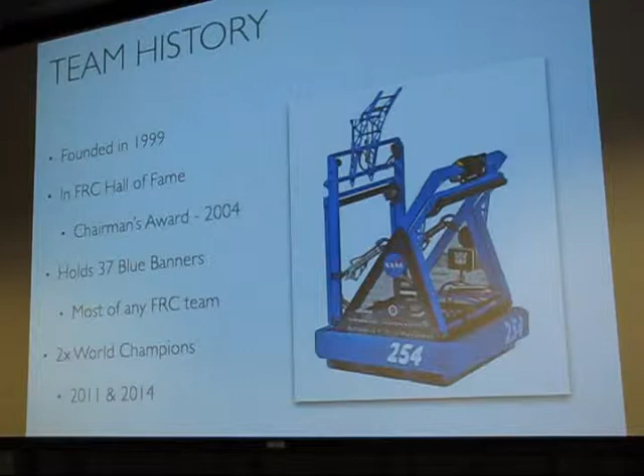What was this game called? This game is called Aerial Assist.

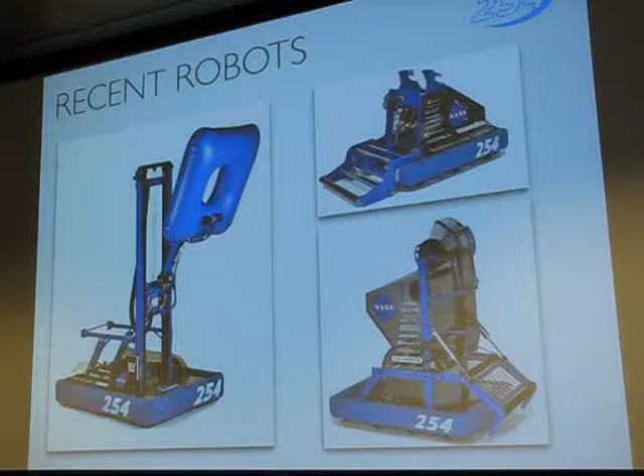So I mentioned that FRC gives you a new game every year, and because January 3rd has already passed, there's a new game for 2015. This year's game is called Recycle Rush. It has a cool little recycle logo there. I should give you the hint - this whole game is themed around recycling.

This slide is a little hard to read, but in the center of the field you can see there's a divider which separates a blue side from a red side. One of the most unique things about this year's game compared to any other FRC game is that this step prevents the blue alliance from ever touching the red alliance, which means this game is not about playing defense or blocking or going around your opponents, but rather about building an extremely efficient robot.

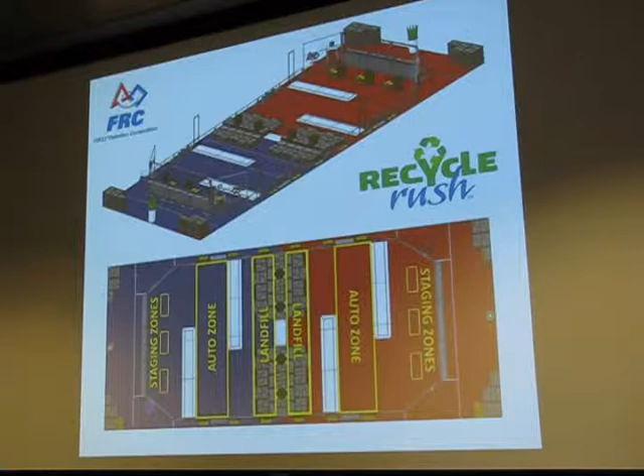The gray rectangles represent a plastic tote, which is only about 2.5 feet by 1.5 feet in size and about 1 foot tall. So it's a pretty large object relative to the size of the robot, and it's also very thick plastic, so it weighs quite a bit.

The goal of the game is to try to stack up these totes, as many as you can, and the higher you go, the more the green recycling can is actually worth. So when you get up all the way to stacks of 6, the max you can go, your recycling can is worth ridiculous amounts of points. So one of the big strategies this year is trying to build these really tall stacks of really heavy totes that are super wobbly - it's almost a nightmare, but we're managing, kind of, sort of.

It's okay, you say totes, is that like a bag or something? Not like a tote bag - it's basically a large plastic box, a storage container pretty much. It has a lid, but the lid stays closed during the game, they zip tie it shut. So it's just a large rectangular prism essentially, but it has slightly trapezoidal sides, so you can't pick it up with a scoop. This year's game is definitely one of the hardest they've ever given us.

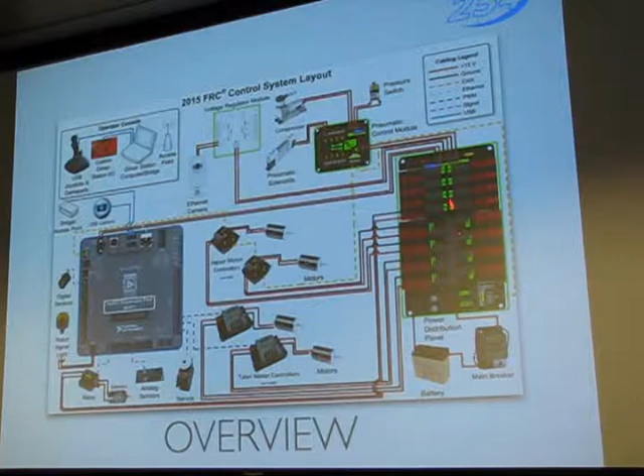So I'm going to talk about the control system for this year, which is different than previous years. First we have an overview. I know this looks a little intimidating, but the major components we're going to talk about are the PDP here, the power distribution panel, the pneumatics control module, the voltage regulator module, and of course the RoboRIO, which is the brain of the robot.

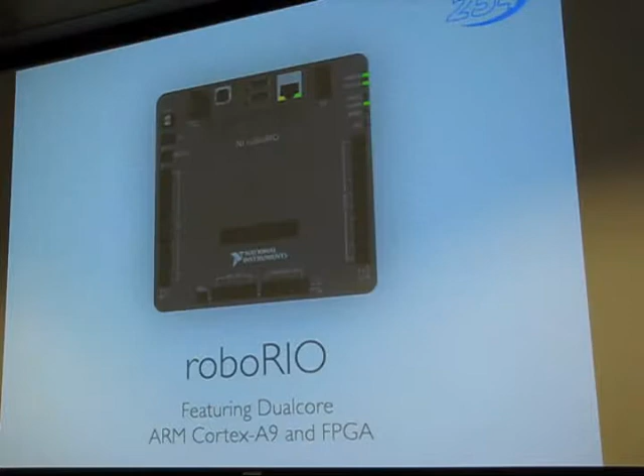So first we're going to talk about the RoboRIO. It has a bunch of these specs you can see here. Not impressive compared to a laptop, but over previous years, it's a huge increase in power, doubling its memory, both non-volatile and volatile.

Also, it's combined 2 units into one, where we used to have a digital sidecar and the cRIO, which is actually on the old robot over there. It combined them both into one now, so you have less space taken up on your drive base for control system elements.

Is that controller commercially available, and how much does it cost? I think it's like $435. Yeah, it comes in the kit of parts though for FRC teams. National Instruments makes it, and because it's combined, it has less ports than it did previously. So what they've done is added this expansion port, which I'll talk about later, but allows us to have more ports than what it has just on it.

So here are some sensors and motors that you plug into the RoboRIO. You have a motor controller and a motor. This is a CIM. This is a Talon. What Talon does is, well, most of you guys probably know, but it takes power from the PDP, the power distribution panel, and a PWM signal from the RoboRIO, and from that determines the magnitude and direction of the rotations on the motor.

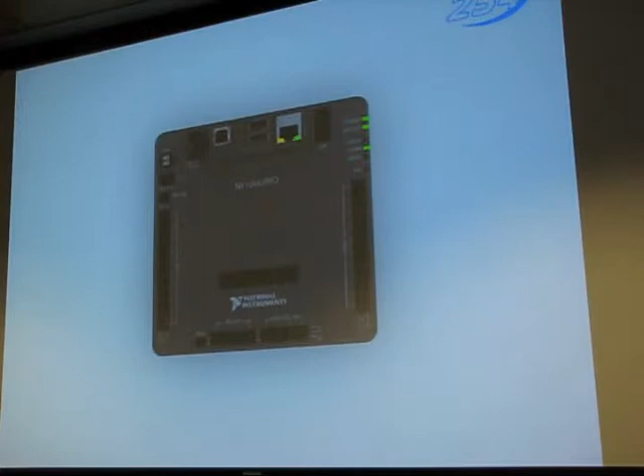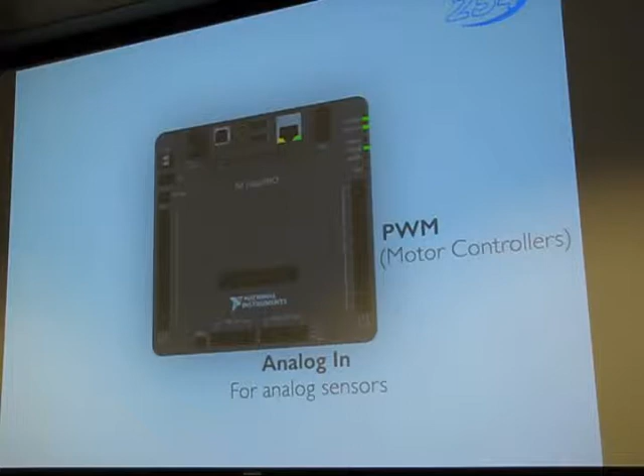All right, so this is a picture of the RoboRIO close-up. First we have PWM, and we have 10 of those, numbered 0 through 9. Those are for your motor controllers. We have analog in for analog sensors. We also have relays over here, but relays aren't used as much because the pneumatics control module can actually take care of some relays. Then we have digital I/O, for digital sensors and peripherals.

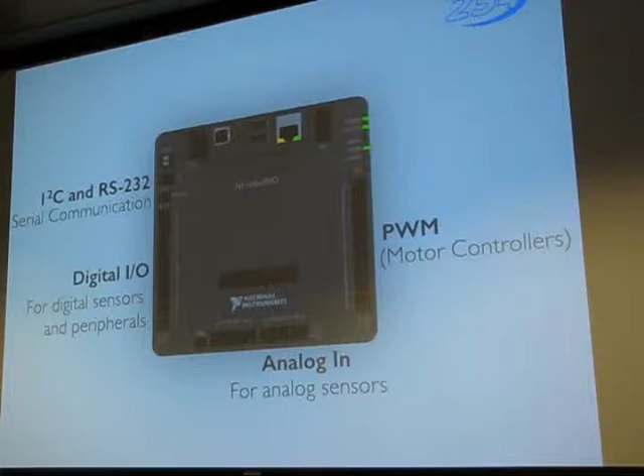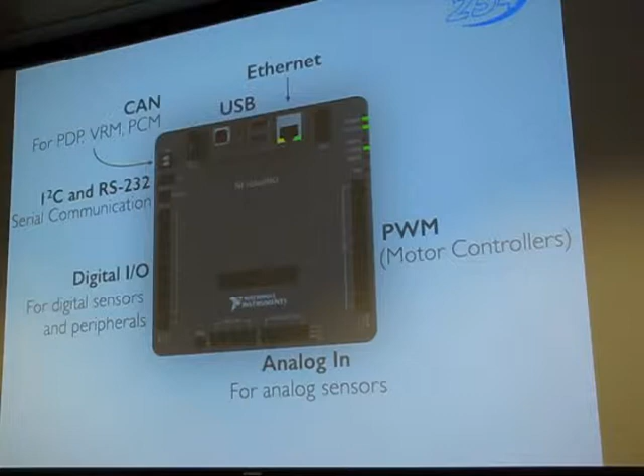We have I2C and RS-232 for serial communication, which previously wasn't available. We have CAN - I'll talk about this even more later, but this is the method that the PDP and PCM communicate with each other, as well as the RoboRIO. Then we have USB - USB host and USB device, Ethernet, and SPI. That's the expansion port right there in the middle. It actually allows you to get analog out, which is not offered on any of these other ports on the edge.

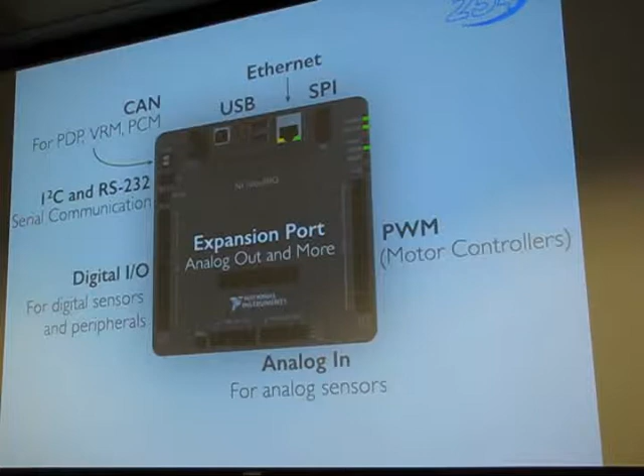So this is the power distribution panel. As you can see, it's got 40 amp channels and 30 amp channels, and it also powers the VRM.

Yeah, that would melt most of our robots. Yeah, this is powered by a 12-volt motorcycle battery. So you go grab the battery. Just to give you an idea of perspective, it takes a lot of power to power this guy. Wow, and that thing is drained after 2 minutes. Yeah, 15 amp hour. Wow.

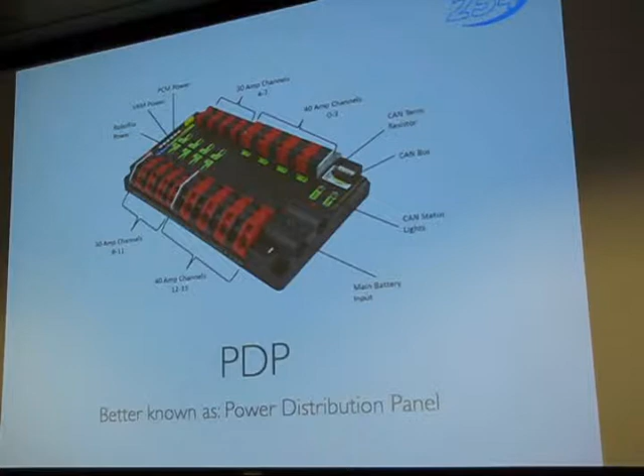So the battery has an Anderson connector that plugs into some leads that plug into this housing. These are CAN status lights, and the CAN cables that connect all the modules together plug in there. These power terminals over here power the other components. CAN data you can get from the PDP includes temperature, voltage, and current, to name a few.

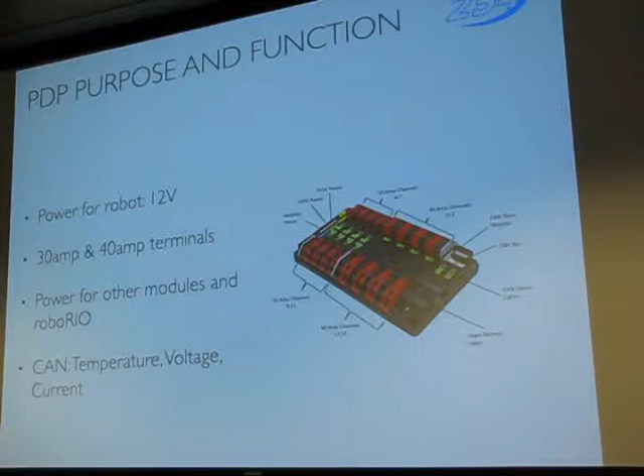So this is the PCM, the pneumatics control module. You would plug in all your solenoids, which operate the cylinders or any other pneumatics pistons. I don't think most of these robots have a lot of pistons.

Actually in FRC we use a lot of pistons. Last year I think we used the most pistons we've ever used before, we had like 17 on that robot. So the robot, because it uses so much air, has a compressor on board too, and it has to refill its air tanks. It actually has a lot of air tanks, 6, well now 7, because you're running out.

Are those also known as solenoids, or do they work like solenoids? Yeah, so you have the solenoid, and basically the solenoid actuates the valve, pushing air on one side or the other.

What's the PSI on the piston? It's like 20, it's regulated, pretty low compared to what it would take to charge a car tire or something. 50, 60 PSI or something? 60 on the outside. 120 internal, and then regulated down to 60.

All right, so it has 7 solenoid channels. Actually, it has 8 solenoid channels because there's a channel 0. And the CAN controls the compressor and the solenoids, and of course the pressure switch. So this is the pressure switch, this is a solenoid, and this is a compressor, although you can use different parts. They have to be similar though.

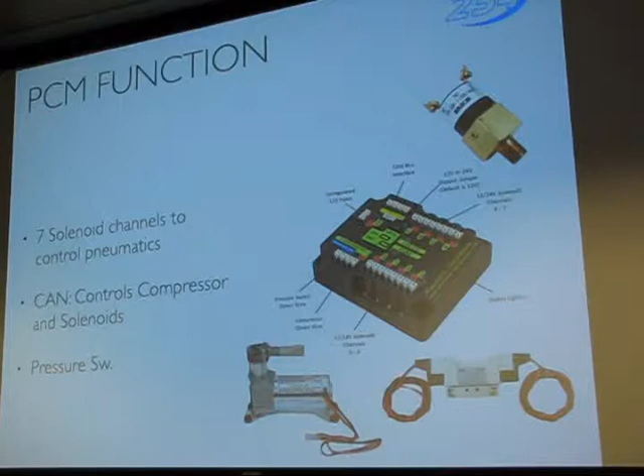And so here you can see the overview again. Now that I've talked about all the parts, it should make a little more sense. One part I didn't talk about though is the main breaker, that's like the power switch for the robot, basically, and like the webcam and some more specific parts that not all teams use.

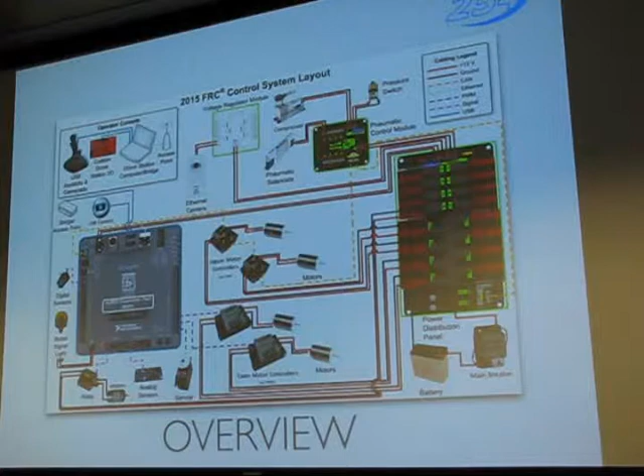And those are boards where you have a laptop and some peripherals. Torrance is going to go get one. It has joysticks and a button board, or some people use steering wheels to move the robot, but that controls the robot in its teleoperated period.

So that's ours from last year. The laptop is what's actually sending the commands through the switch to the router, which goes back then to the robot. And then we have a button panel over here, so you have one student that can operate all these different buttons, which do tons of different features on the robot. It'll lower this thing, actuate this back, spin up the wheel to shoot. This is called the operator, the student that stands and uses all these buttons.

The operator communicates with the driver, who has simply 2 joysticks configured to drive a lot like a first-person shooter. One moves you forward and back and can turn you, the other turns you left and right. In combination, it makes it easy for the driver to smoothly drive around the field without a lot of stop, turn, stop, turn. With enough practice, you can get really good drivers, and that's a big part of your success in the match.

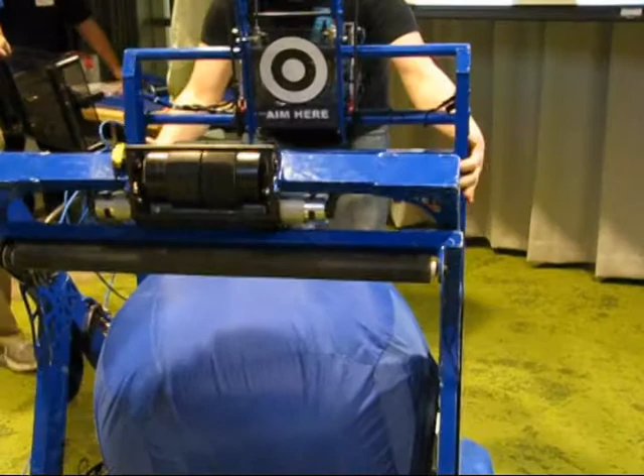Let's get rid of this guy. Actually, no, let's just slide that table out of the way. Where do you want to move? Yeah, let's move the robot. One cool tidbit of info is that we name all of our robots after Decepticons, because Decepticons are super cool. So Barrage is our most recent robot.

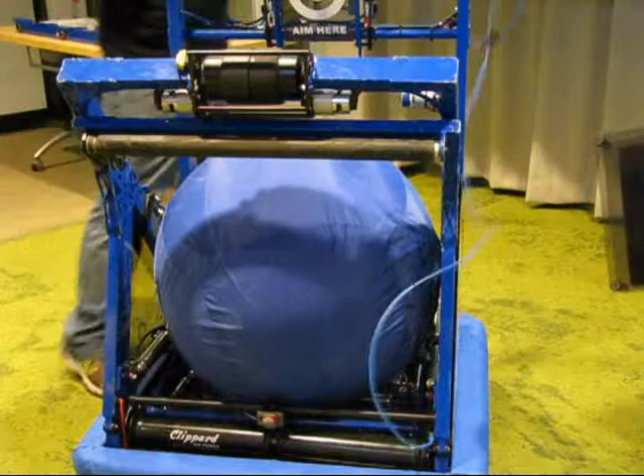What are Decepticons? They're the evil version of Autobots—both Decepticons and Autobots are Transformers. Robots in disguise. Autobots are cool, Decepticons are even cooler. How did you guys end up with the number 254?

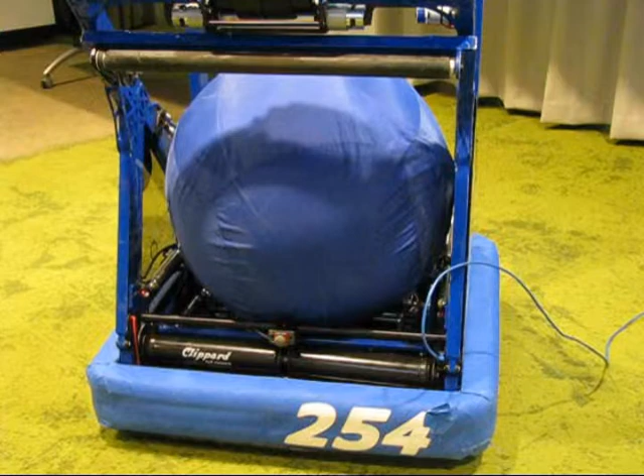They're up to 8,000 now. I'm gonna turn off the microphone, put it down for us. Can you turn on the robot? Yeah, that's a good first step. Now, we don't have liability insurance, so it's not gonna start throwing the ball at us, but it's promised not to move. You actually have to turn it that way so we don't shoot it anyway. Try not to break it. Yes.

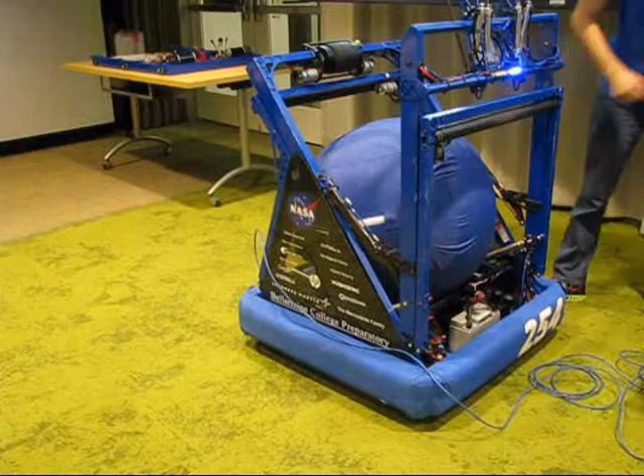Okay, awesome, let me back up a little bit. Aim at the thin glass windows. So one of the things our robot can do is defense. Aim it at... is that Google space? Employees, so there's no liability.

Okay, so let's just do a front exhaust. That was one button that operated two different systems simultaneously. On the interior of the robot, we have a hinged series of two bars that can independently actuate up.

Let me actually—Ryan, you hold this, just don't press any buttons. So you can kind of see it in this photo: there are two bars that are individually actuated up by pneumatic pistons, so they can go up like this.

When we shoot the ball, both sides will come up at the same time and clap together. Because of that clapping action, we call it a pinniped, which is the scientific name for a seal, because it claps like that.

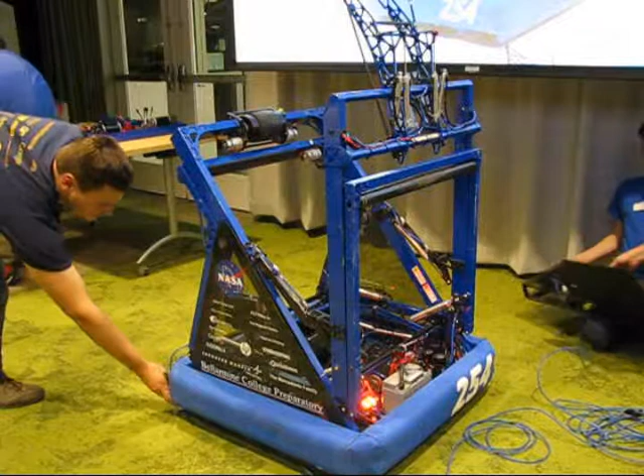The intake roller has a black horizontal roller you can see in the photo at the front. The black roller spins and sucks in the ball as the angled weldment comes down over it. So we'll get rid of it—sample return—and then roll it in one more time.

One of the features we tried to design around was making it so it can pick up the ball from the side. You don't have to be straight on, which helps a lot with driver ease and ability.

So we're now going to go to shooter speed 1. Our shooter system is actually the part of the robot I worked on the most. It was super cool, I like to brag about it a lot.

The front roller you can see there—this is a large black rubber flywheel that's very heavy and has a large moment of inertia. When we spin this up, we use two pretty large, beefy motors. You can see this is one of the motors we use to spin that, and it will get up to our max speed of 5,000 RPM.

We're not going to 5,000 RPM indoors, but it's very loud. We'll use that speed when shooting the ball in a Hail Mary across the field, but most of the time we're spinning at a much slower, more controlled speed, fine-tuned around those slower speeds.

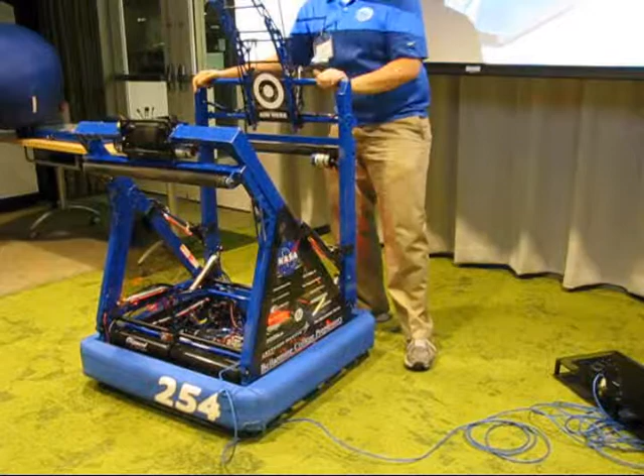If you haven't seen it yet, we've got a great little target right here. This is aimed here. Target is not a sponsor, although, that is a trademark infringement. It's for educational purposes. Educational, yeah.

Okay, so let's do... and this is the... no, I'm not gonna shoot. There's the other position on the hood. You can see what this looks like now. With this back, it'll be a high release angle. I don't want to shoot that in here or it'll smash the roof. So, yeah, definitely not part of the contract.

Okay, so I guess the one other thing we didn't show is that it can drive. It can drive really fast, actually, almost 20 feet per second at top speed. The field, for perspective, is 60 feet long, so it's almost the length of this whole room. Our robot can cross that field in about five seconds or less. Maybe like three, if there's no one in the way. With robots on the field, you've gotta go around people.

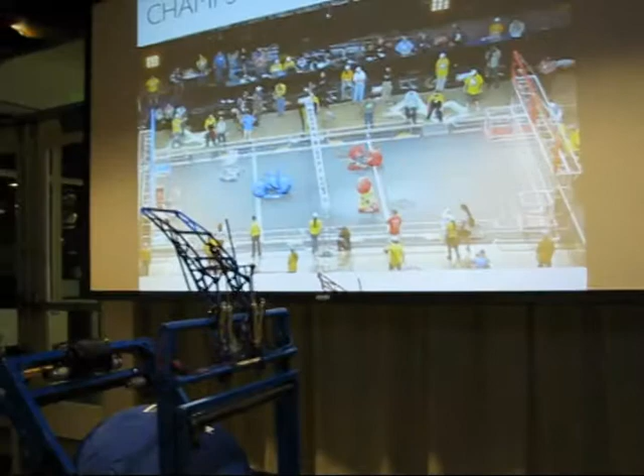Actually, let me pull this up, I want to go back. One of the coolest robots in that final match with us actually had... way too far, wait. I'm gonna pause it, I think. It's the yellow one, right? The reason I'm showing you this is I want you to see. Oops, no, darn it, it's the yellow one. Okay, so this yellow robot, Team 1640, is actually a robot with full swerve capability. If you look at it drive, it's actually not moving in straight lines relative to the frame. It can fully turn all of its wheels 360 degrees. You'll see that down here, they're going to try to drive around us, and they're driving sideways right there. Now they're pushing into us laterally. So it's definitely a really good feature to have, but you can also get pushed around a lot. But now I've gotta talk about the cons, and the reason why all of our robots for the past five years have all been a very straightforward six-wheel or eight-wheel drive.

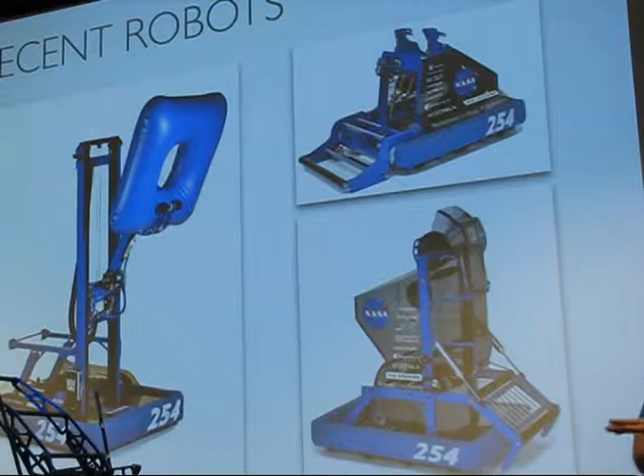So you can see 1, 2, 3 wheels on this side, 3 on the other. The straight wheel alignment is extremely simple and lightweight, which makes it so we can focus our efforts in the 6-week build season on other parts of the robot.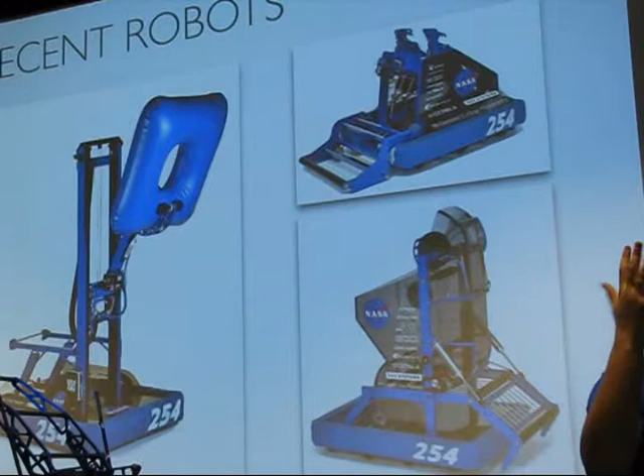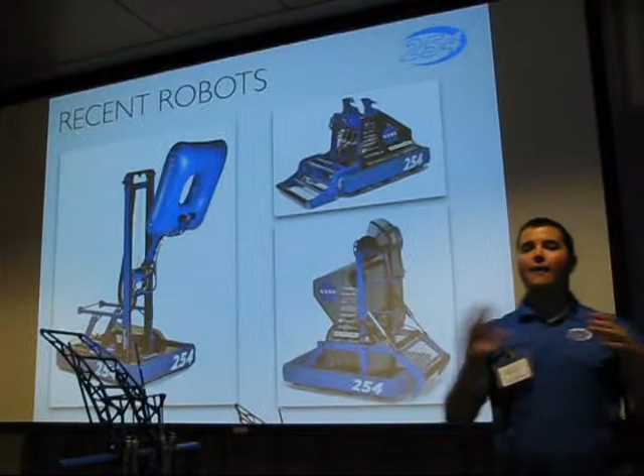Teams that build really complicated, fully turning things, or use more complicated omni wheels with fancier programming to allow them to strafe, all of those teams typically have a heavier drive base. They spend more time making it, more time tuning it, and it breaks down more often. So we prefer to use a tried and true 6-wheel drive, and then train our drivers to be super good and build the rest of the robot to the best of its ability.

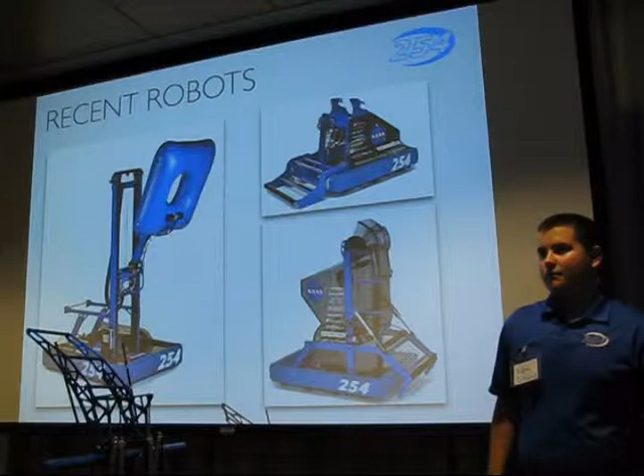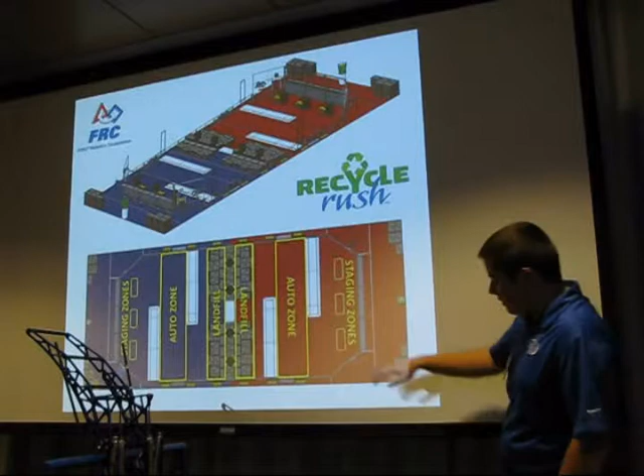In this year's game, how much do you have to rely on your allies? Let me pull up the image while I talk about it. This year's game is definitely an interesting one because there's this clear division between red and blue, and you're not really allowed to interact with the enemy alliance. It means you have to work a lot more closely with the members on your alliance. Also, you're only working in half of the field compared to last year, when you had the whole length. So you're kind of afraid of bumping into your other alliance robots, and there's definitely some coordination that's required.

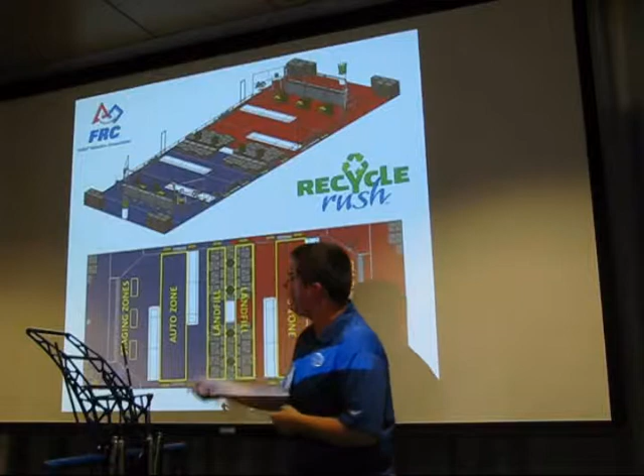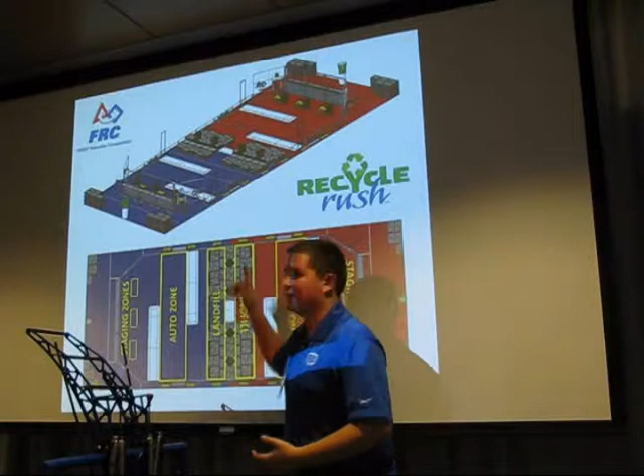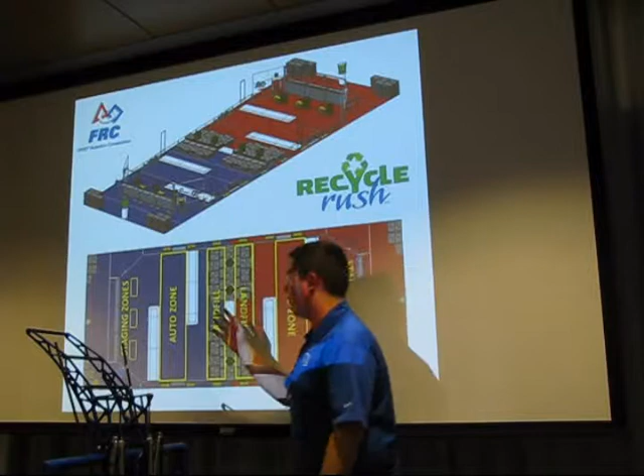The major rule of thumb with our team especially is that we never design our robot to be dependent upon another robot. Because of the way the match scheduling works, you're randomly paired with people and randomly paired against other people. So you can't guarantee you're going to be with that robot that can, for example, put the recycling cans on top in this game. That's a huge point value. If you don't happen to be with that robot in that match, you're going to get way less points than you could have. So our rule of thumb is always design a robot that can operate independently to the best of its ability and not have to rely on anyone else.

And when you do have partners, especially really good partners, it's just an exponential boon over what you could have gotten originally, rather than being a detriment for when you have a so-so or average partner.

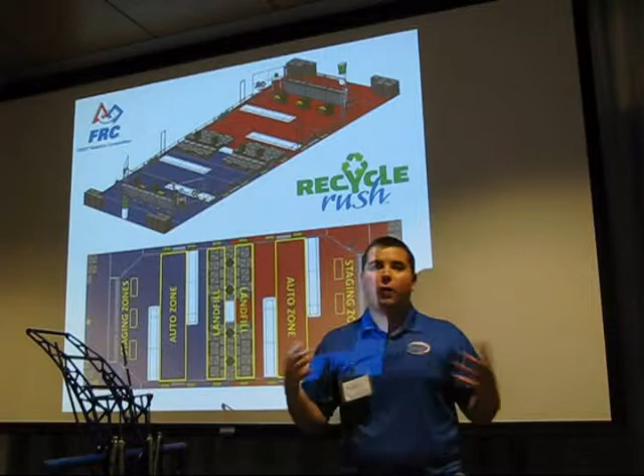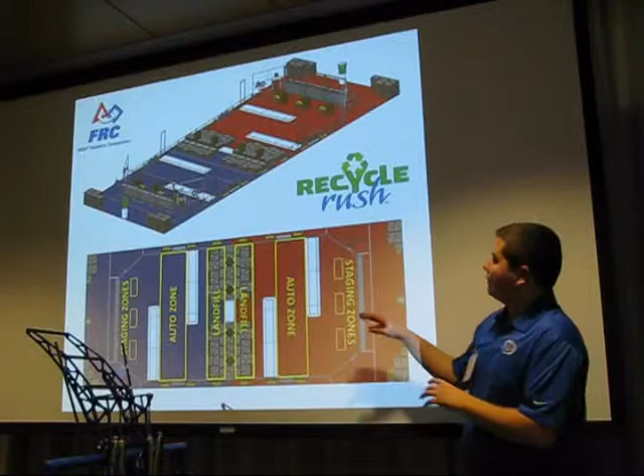Are you allowed to coordinate a strategy with your other partners during each match? Definitely. Before the match, you actually have quite a bit of time when you're standing in line and waiting, and you can be talking with your partners. This year, the strategy might be simpler to communicate because all you have to do is say, okay, I'm going to be in this corner, you're in that corner, and third robot's over there. That way you won't bump into each other—boom, boom, strategy's done.

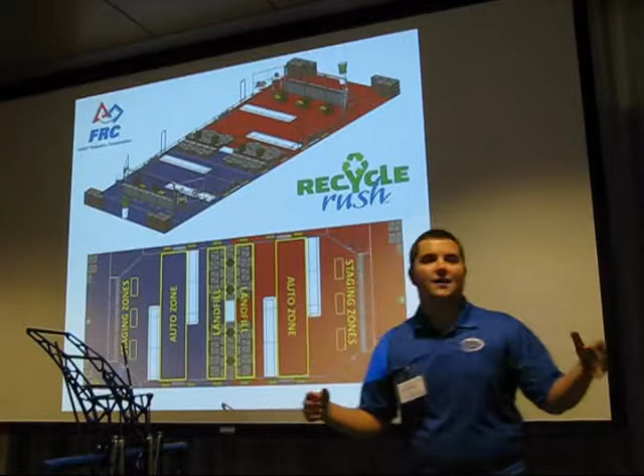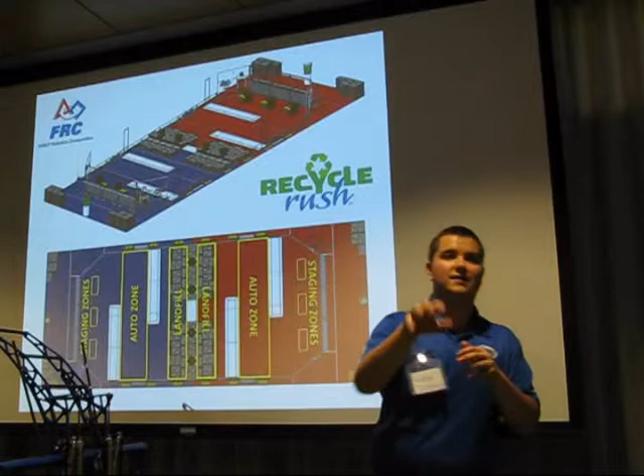But sometimes, if your robot's dependent on others, you will have to strategize with them. If we remember last year's game with this robot, the amount of strategy that went into a match was ridiculous. You had to pass the ball between different robots, and you had to do it in certain colored zones. So you had to be in the correct spot on the field at the right time to be the correct robot to receive the ball. Then you had to know what to do next, like throw it over the truss or something. So all of those different steps were something that we talked about.

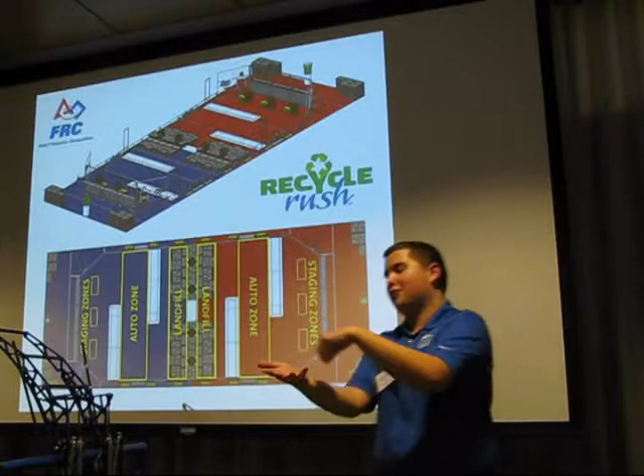One cool thing is last year we actually made play cards, like in football, where you have a laminated sheet and you draw out the path that everyone's going to go. We had stuff like that, but for robots. So we'd be like, oh, you go over there, you go over here, and together with our partners it allowed us to make really effective strategies for each match.

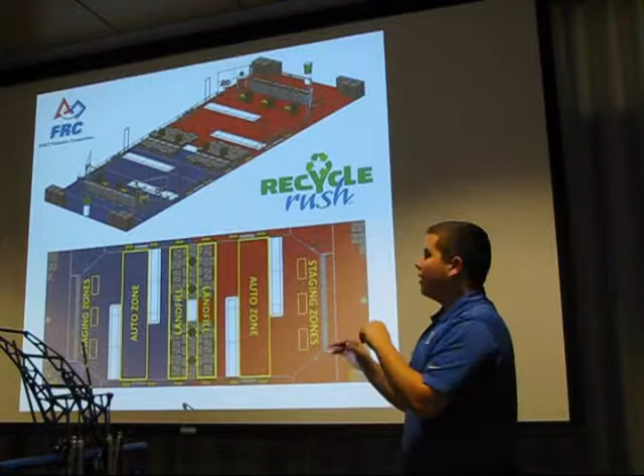In the majority of the tournament—Friday and Saturday of a 3-day tournament—you're mostly playing only qualification matches where you're randomly partnered with people. So no one really wins when you win a match; it just places your robot higher relative to the robots that lose. However, when you get to Sunday, you have to do playoffs where the number 1 robot will pick some other robot, usually the number 2 robot, and then the number 3 robot can pick usually the number 4 robot, but it can vary depending on if you want to play a specific strategy.

So it's at that point when you get to the elimination matches where the teams that you pick, if you win, those will be the teams that also receive the exact same trophy, the same medal, the same blue banner. Were you guys the pickers or the pickees?

It varies, but for the championship we were the number 1 seed, so we got to pick. In our division of 100 teams, we played 10 matches and didn't lose a single one, which placed us at the number 1 spot. We picked the number 4 robot because they were super good - that was team 469.

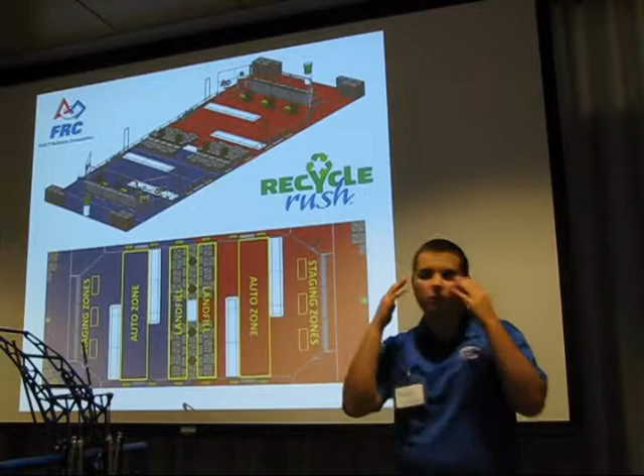Then the other alliances actually got to pick, so it went first pick, then second - 1, 2, 3, 4, 5, 6, 7, 8. Once you get to 8, it actually goes back serpentine: 8, 7, 6, 5, 4, 3, 2, 1. Our number 1 pick was the best robot in our opinion, but our second pick for our third robot was pretty low on our totem pole, but pretty high relative to the other 50 teams. So there's definitely a ton of strategy that you don't even have to know how the robot works to help with - choosing which team to pick, who we're going to play with, how that's going to be better than this robot, stuff like that.

Do you have a strategy for this year's robot, or are you still in the brainstorming phase? We definitely have a strategy. I'm not really allowed to share it with you because it may vary, and we also want to keep it secret until our robot's revealed. Once you see our robot, you will instantly know what our strategy is. I'll just put it that way.

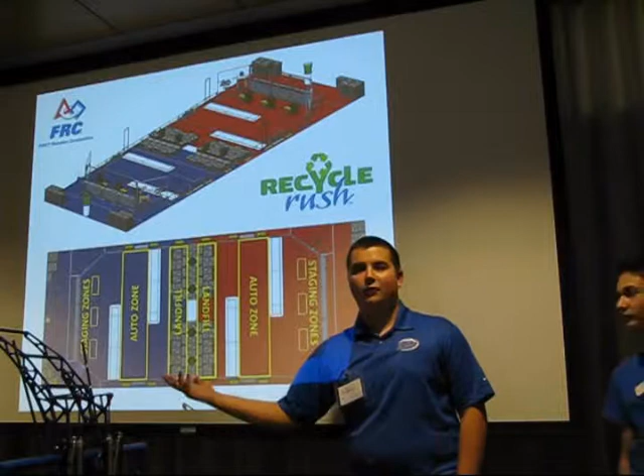But definitely the strategy portion of the game is one of my favorites because it's where your team has the most flexibility. Last year, our big strategy decision was to do that 3-ball autonomous mode, and that ended up being really good for us. We designed our whole robot around that, and it was awesome. So we just gotta hope.

Are you going to do a 3-object autonomous mode this time? Very likely. I'll say that.

Has this robot ever lost? Yes, it has. In addition to losing matches, occasionally we get randomly paired against 2 or 3 really, really good robots that are just as good as us, and there's no way we can beat them - we just lose that one match. We got lucky at the World Championships and didn't have that happen, so we were able to get undefeated for those qualifications. But this robot's been in many competitions.

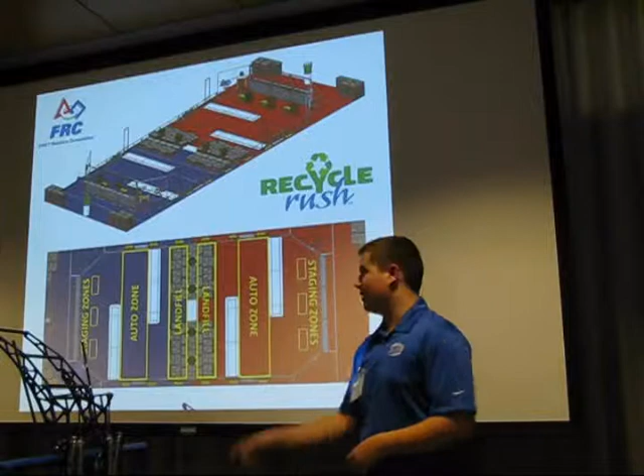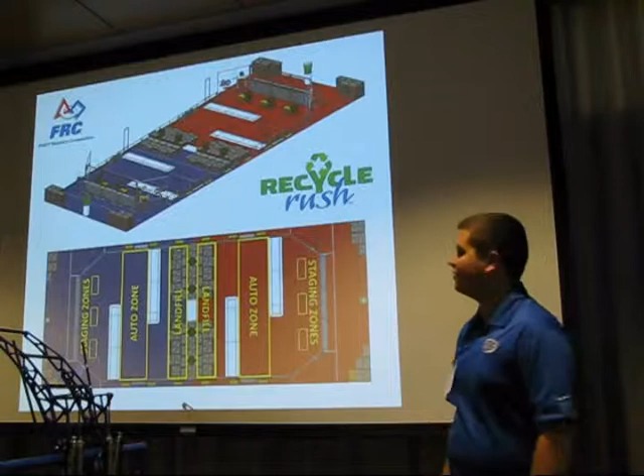In the reveal video, you saw that we mentioned the Central Valley Regional, which is in the city of Madera, and the Silicon Valley Regional, which is in San Jose. That's actually coming up if you guys want to check that out - it's at San Jose State. I think it's the same time as Robo Games.

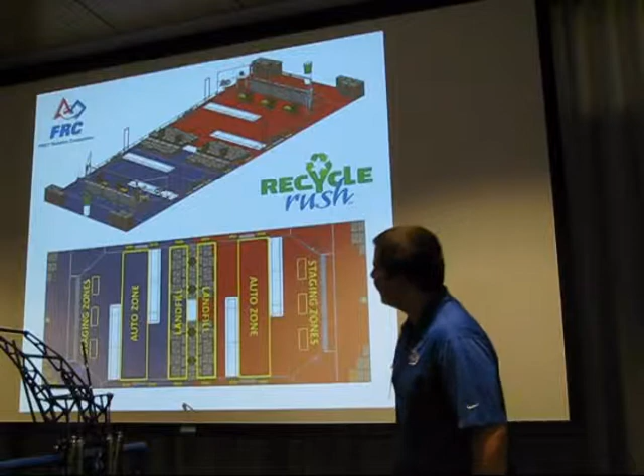Oh, really? That's terrible timing. Well, if you don't want to go to Robo Games, or you're unable to, I'll just say that FRC events are free admission. Robo Games is awesome, I'm not dissing Robo Games at all. That's okay, that's my big selling point. You'll do well, Andrew. You'll do well.

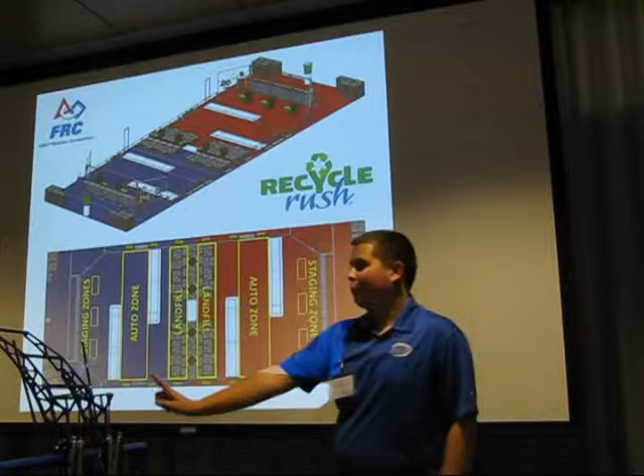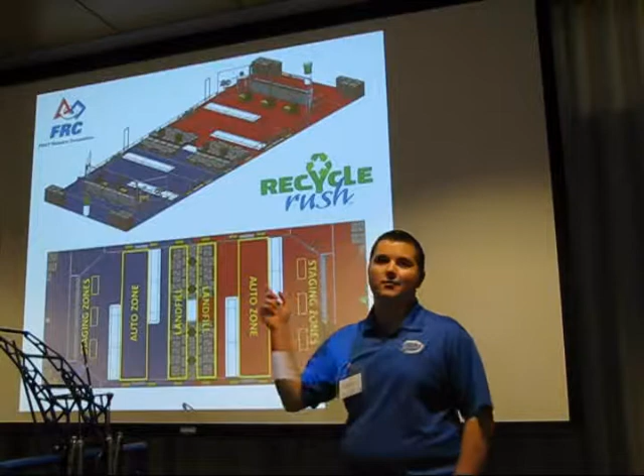Then the third regional we went to last year with this robot was actually Waterloo, Canada. So we flew to New York and then drove into Canada and competed against the second best robot in the world. If we were number 1, it was the team we were fighting in the finals of Einstein - Team 1114, Simbotics. We're the big blue robot, they're the big red robot. So it was really awesome - we ended up beating them and winning Waterloo.

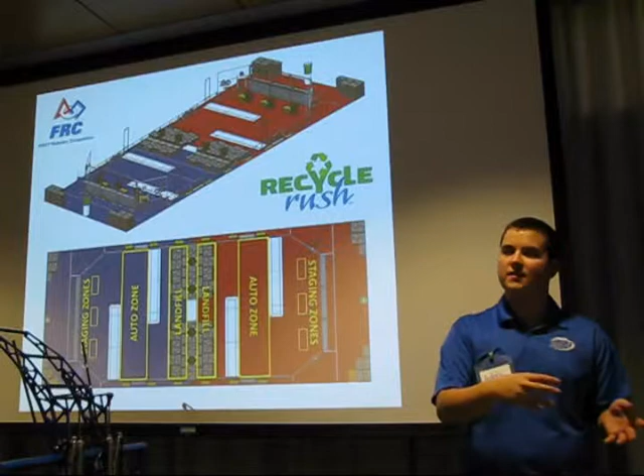So in the end, this robot won 3 regionals, then it won its division at the World Championships, then it won the World Championships. Then we took it to off-season events, which are not run by FIRST, but rather by teams, and are more loose on the rules and a bit more fun and open-ended, but they still give trophies and awards. We took this robot to 3 off-seasons - the first was IRI, Indiana Robotics Invitational, where we got invited to this prestigious elite tournament in Indiana.

It was the most prestigious tournament, Andy Mark's in Indiana. We competed against the best teams in the world, but that was the one tournament we did not win. We became finalists at IRI, 2nd place. It's kind of a bummer, but if we win every tournament, that would be no fun for the other teams. So you gotta lose one.

So it is possible for you to lose. Yes, we have lost, one time. We lost one off season.

The next two off seasons we went to, the second one was Cheesy Champs, an off season that we ran at our school. We're the Cheesy Poofs. We had 38 teams there. It was super cool. We weren't aiming to win our own tournament, but we got picked, and so we won.

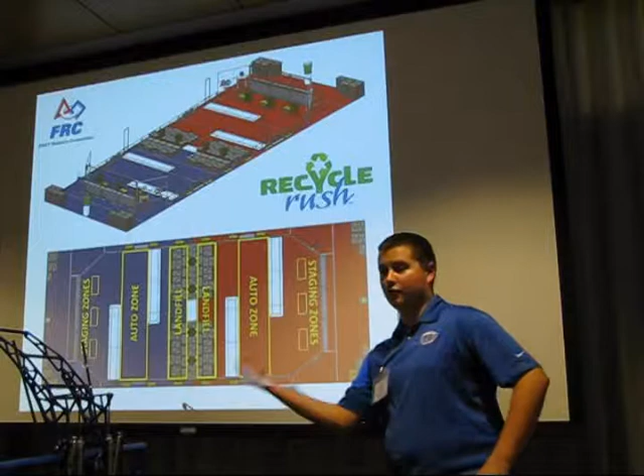Did you go to WRRF? WRRF did not help run our tournament, but there's another tournament they run called Cal Games. We did not go this year because we were busy planning for Cheesy Champs, but Cal Games is a tournament we've gone to in the past, and we've done pretty well there sometimes.

And then the third off season we went to was Madtown Throwdown, also in Madera, and we ended up winning that too. So this robot has definitely been successful.

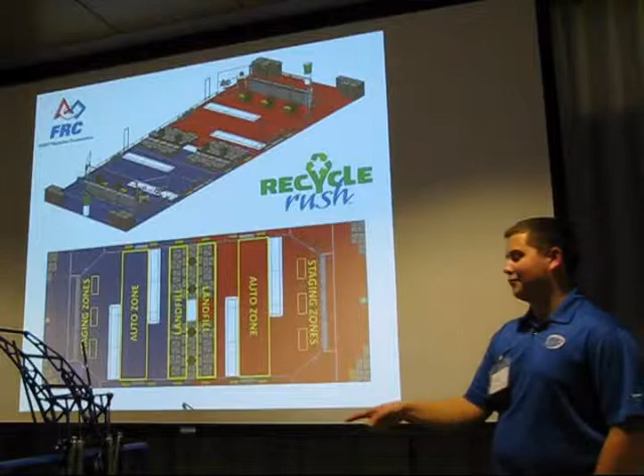How much more time do we have? Probably about 2 more questions. Okay, yeah.

For operating effectively as a team, how does that work? You have a crew chief. I see you've got 2 people actually controlling the robot. You've got people interacting from the sidelines, throwing balls in and so forth. How does that work? Who's the boss? How do you coordinate? So we have a drive team which consists of 4 people.

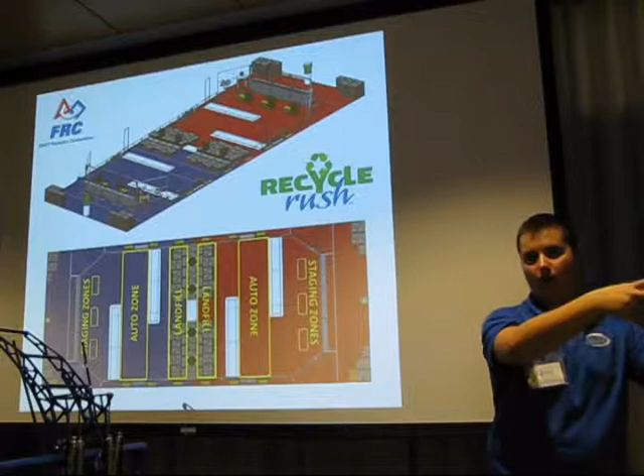3 of them have to be students, and those 3 are the driver, the operator, and the human player. The human player is the person who last year threw the ball into the robot. This year, the human player actually stands right here and can put these gray totes into the field for more totes onto the field. So the human player helps a little bit.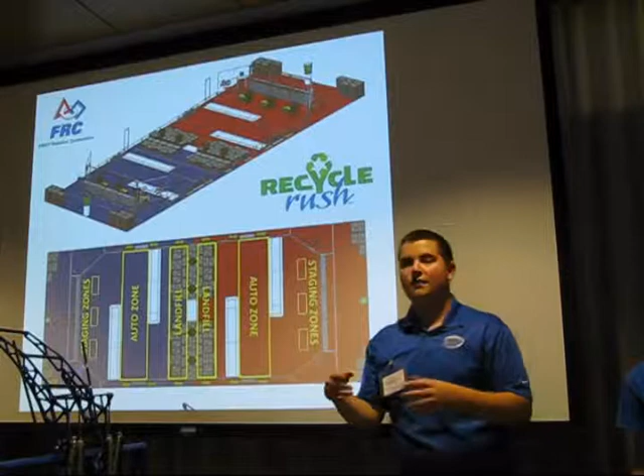And then the 4th member of that team can either be a student or an adult mentor. That person's called the drive coach, and they're the ultimate strategist when it comes to what your drive team is going to be doing.

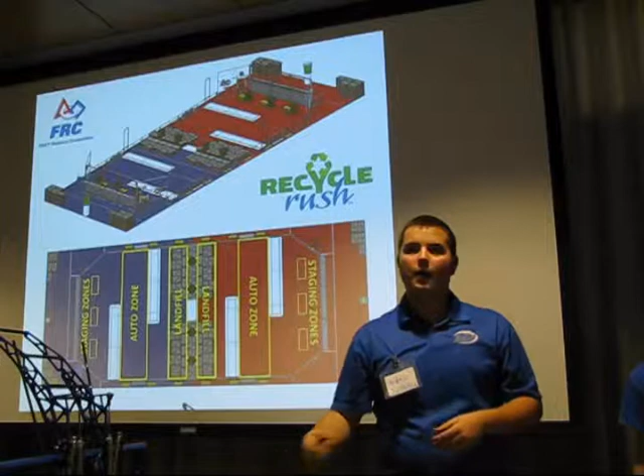Typically the driver and the operator are simply controlling the robot. They're watching the robot, but that adult or student coach stands behind them, and they're watching the entire field, watching the clock. How many more seconds do we have? They're talking to the other coaches - where are you going, where are you going, okay you go next. So it's a combination of the coach telling the drivers and the operator what to do, and that chain of command helps make drive teams really efficient.

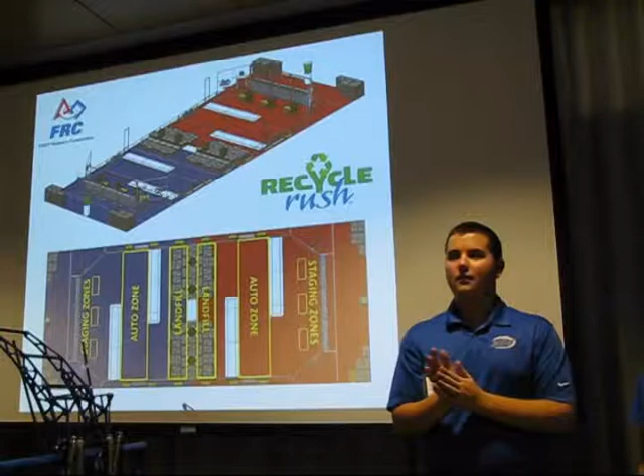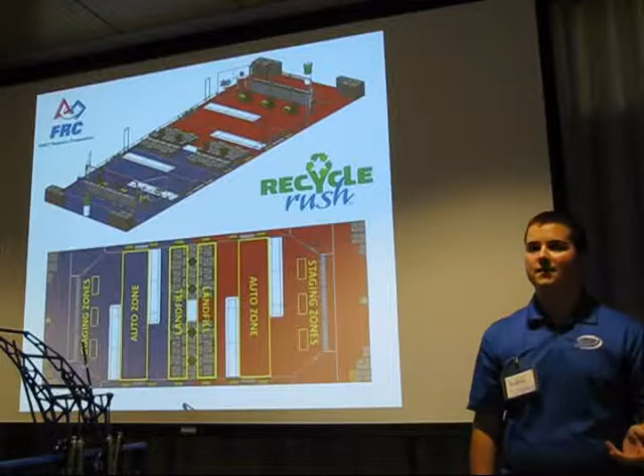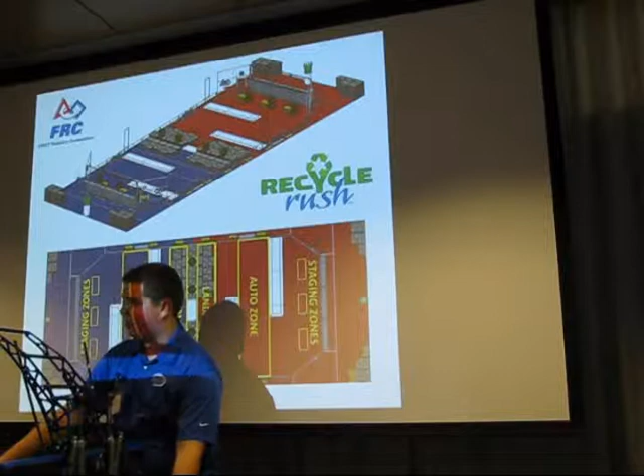One more question. How much does it cost? Technically, the limit of the robot on all of the components it can have, excluding electrical components and pneumatics systems, is $4,000. That includes extra electronics like sensors and stuff, but it excludes stuff like the main electronics, like the RoboRIO and stuff we were showing earlier.

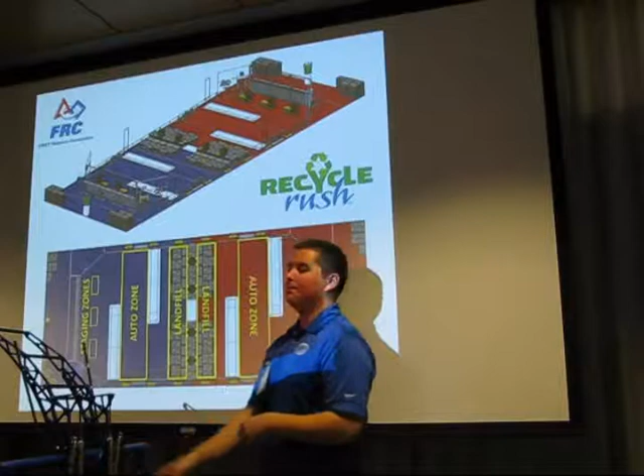The way that we are able to build fancy robots for relatively low amounts of money is by having a lot of sponsors. So this side panel, you can see if you lean forward, or we get a camera - oh, it's on the back of Ryan's shirt too. Yeah, we have like NASCAR shirts. It's super cool.

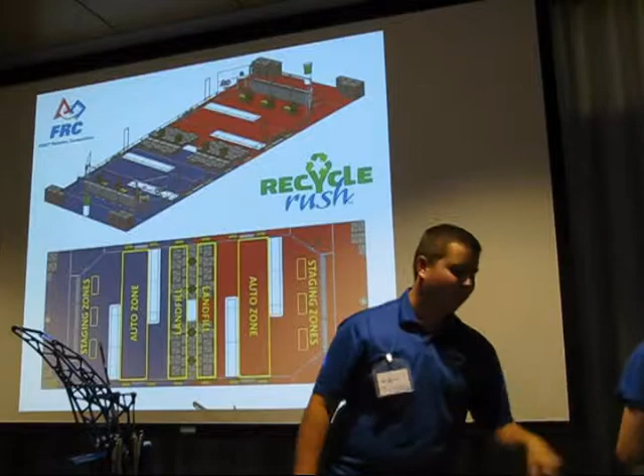We put all of our sponsors on the side of our robots to give them recognition, and those sponsors either give us money or they give us in-kind donations such as welding, powder coating, anodizing, water jet - all these different tools we use to build the robot. That's all for it.

Thank you very, very much. Very exciting talk. I'm sure you can ask lots of questions afterwards. Thank you for not driving it around and for not killing anybody. Okay.